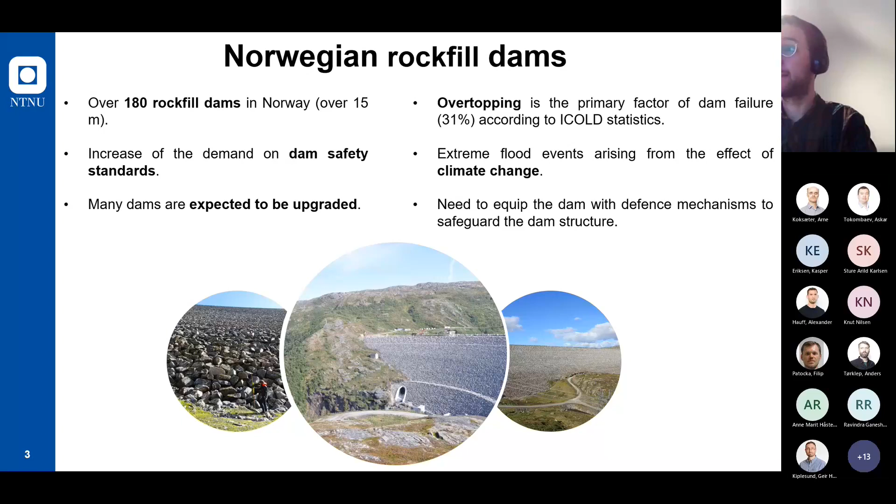If we go a bit more into detail of the overtopping mechanism, when we have overtopping conditions, the downstream slope of the rockfill dam is subjected to highly destabilizing forces. Those are generated due to both turbulent through flow, which is basically the overtopping of the dam core, but also overflow, which is the overtopping of the dam crest.

So the through flow mechanism provides internal erosion destabilization of the embankment inside the dam with an increase of the pore pressure, while from the overflow, we get external erosion processes.

So we have two key components in order to safeguard the dam, which are the ripraps and also the rockfill dam toes. The toe, located there on the pictures, can provide efficient expulsion of the seepage from within the dam, which decreases internal erosion and can then reduce the pore pressure.

While the riprap, and we will focus on that aspect today, can protect against external erosion due either to overtopping, as we said, or to accidental leakages.

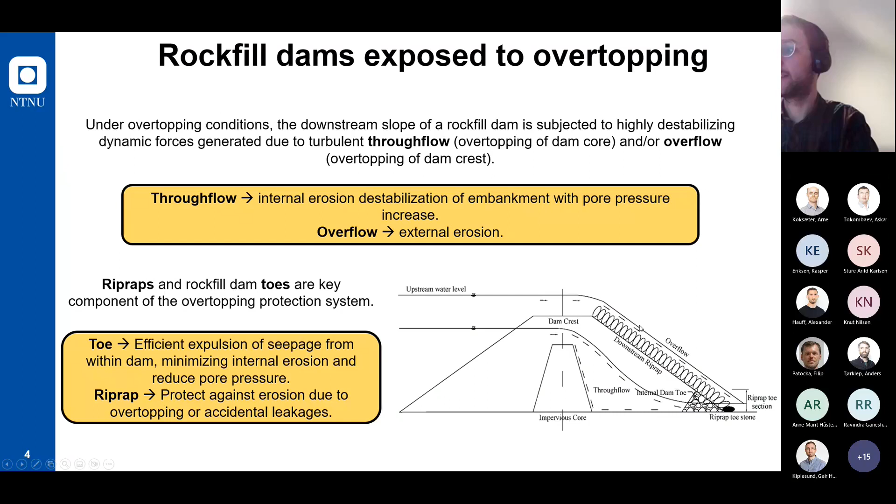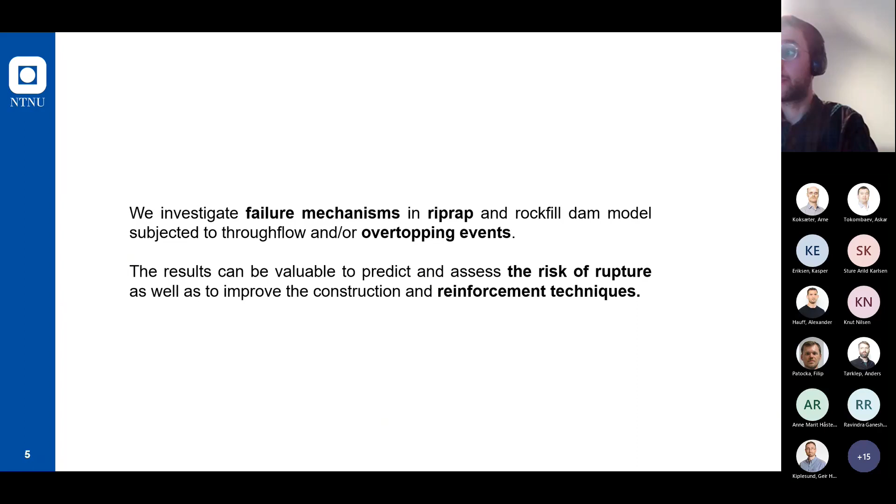So my topic, and the objective of the postdoc, is basically to investigate failure mechanisms in riprap and rockfill dam models that are subjected to through flow and to overtopping events. Such results would be valuable to predict and assess the risk of rupture, as well as to improve the construction and reinforcement techniques of the dam.

So I have split my presentation into different topics, different subsections, let's say, which correspond to different work I've been submitting or presenting in different conferences or journal articles.

So first I will start with an article that was published as a special issue in the Water Journal, which is an article about riprap protection exposed to the overtopping phenomenon, and it's basically a kind of review of the laboratory experimental models that we've had in the hydraulic lab. So it's not only my work, but models that were already built before I started.

So the common characteristic of all the experimental setups: they were all built in the hydraulic lab at NTNU, in that red flume you can see there, which is quite big, 25 by 2 by 1 cubic meters. We built models considered to be 1 to 10 scale models of rockfill dams, with the particularity that we have a very steep downstream slope of 1 to 1.5.

For all the models we've been building, we chose the material dimensions according to the NVE guidelines, the Norwegian Water Resources and Energy Directorate. Basically what we do is build the model and then expose it to incremental overtopping discharges. The discharge levels are maintained constant over a regular time interval to allow flow stabilization at each overtopping interval, then we repeat the procedure until we have complete failure of the model. This is what we're looking at.

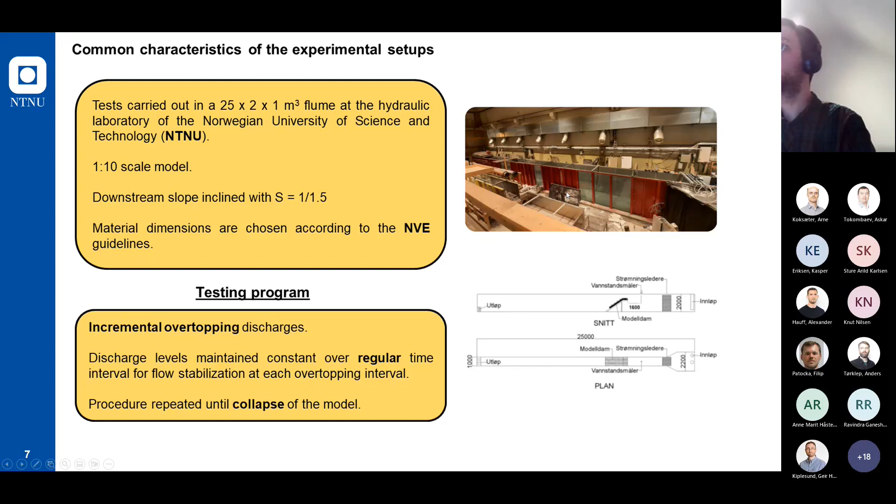I hope you can see the animations.

The first models to be built were built by Priska Hiller during her PhD, and then it was done again during Ganesh Ravindra's PhD afterwards. First, to study the stability of riprap, they were built on a ramp without any shell material below, just a layer of filter material with homogeneous grain size.

You can see we have two different configurations of riprap. On the left side is what we call dumped riprap, basically randomly placed stones put on the downstream slope without paying attention to their position. On the right side you can see placed riprap stones, which have been placed manually in an interlocking pattern so they fit together well. It takes more time to build those models, but they are much more resistant to overtopping.

When we expose those two models to overtopping discharges, in yellow there, you can see what we call the critical discharges - for which discharge level does the model fail? For the dumped riprap model, the model failed at 40 liters per second, while it was 275 liters per second for the placed riprap model. So you can see the difference in resistance between both models.

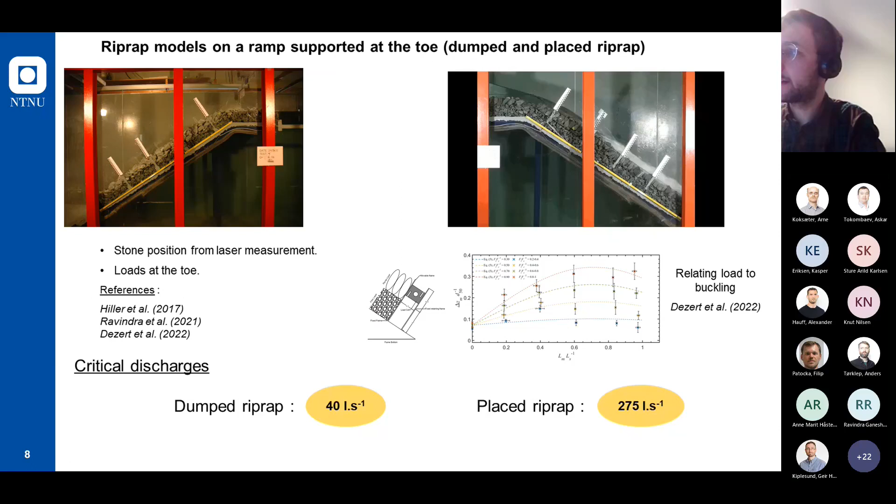However, for the placed riprap layer, the resistance is much higher when we have toe support - 275 liters per second when supported, only 60 liters per second when not supported. So the toe support definitely has a huge impact on resistance, and we still observe the same failure mechanism, the whole layer sliding instead of external erosion, everything sliding at once when we reach the critical discharge.

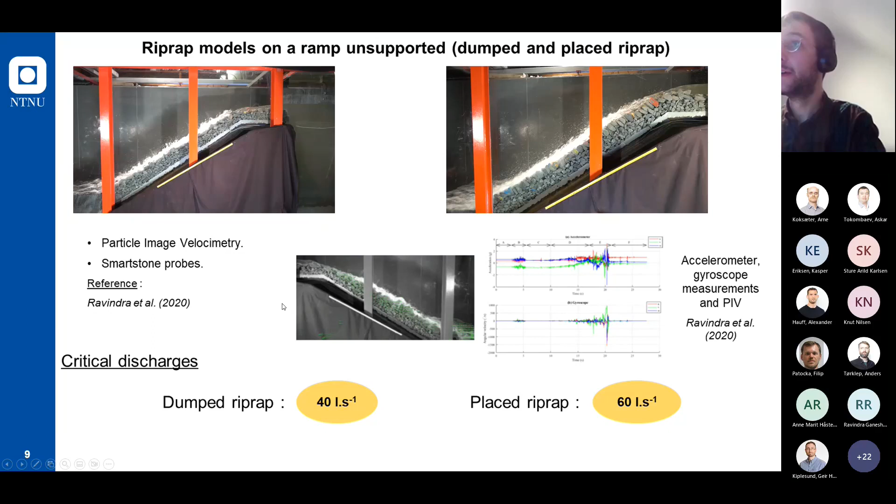From this model, Ganesh in his PhD could investigate the movement of the stones using PIV technique and also the use of smart stone probes. Then what was done, also during Ganesh's PhD, is build models with shell material below, so we could try to understand the impact of through flow.

As you can see, the critical discharges are about twice less important than when we did not have the shell material. For the model with dumped riprap, we have some external erosion reducing the steepness of the slope, then continuing eroding the shell material after eroding the riprap and filter material.

For the placed riprap layer, we observe the same mechanism as on the ramp: full sliding of the whole layer once we reach the critical discharge. Both of these models were not supported at the toe.

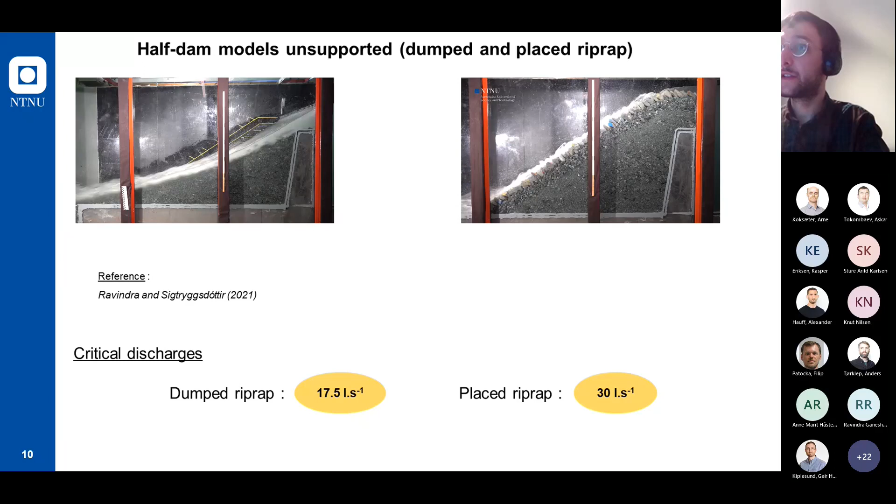During my postdoc, I could build the same kind of model, but this time supported at the toe. The point of this work was to see if we were still seeing the failure mechanism I told you earlier, which is the buckling. We have sliding of the whole placed riprap layer, but before the sliding there is a deformation of this riprap layer, which we call buckling, with deformation in the X and Z directions.

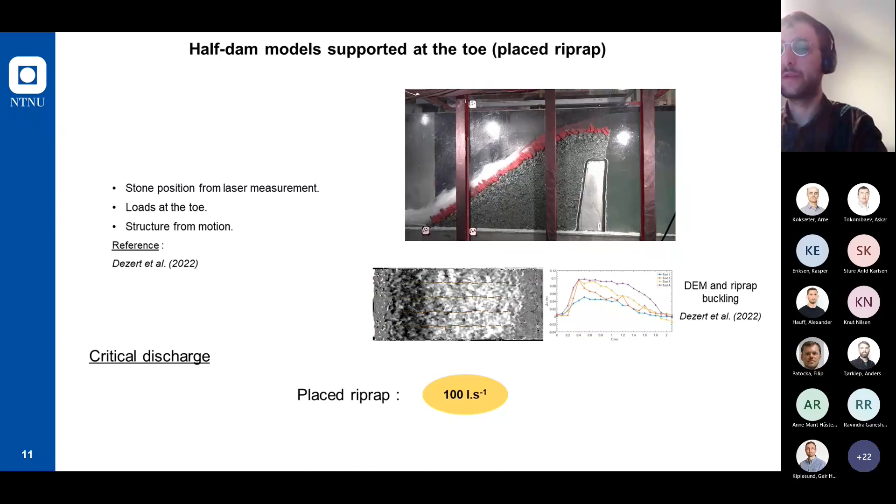The improvement during those tests is that we could measure the displacement of riprap not only from laser measurement as done before, but also using structure from motion to see the whole deformation from 3D models. We could also measure the load at the toe.

Finally, during Geir Kiplesund's PhD, he could build models with not only the downstream part of the dam but the full dam, for both placed and dumped riprap models, and we observed the same failure mechanism.

So with the dumped riprap model, guess what? Surface erosion, external erosion, reducing the steepness of the slope, slowly eroding the material.

And what we observe for the placed riprap layer is something just as before: much more sudden, with a whole sliding of the riprap layer. So there it is for placed riprap.

It's a totally different process. Everything just slides at once. That's mainly the difference between both models.

With placed riprap, more security, it resists more time. You see the critical discharge is higher, but when it fails, it really fails more suddenly. Geir could also work on structure from motion and use pore pressure cells to investigate that topic.

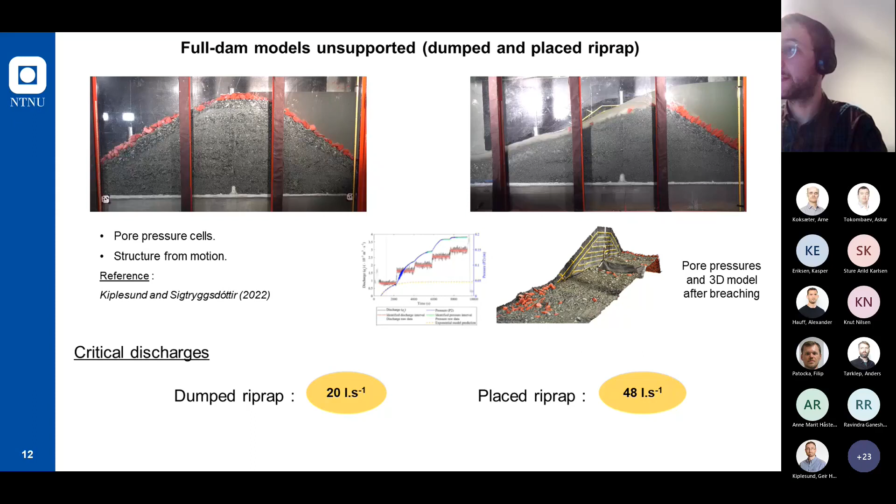So I can draw some research conclusions from this historical work that was done. First, the role of toe support.

What we know is that there is no impact on the surface erosion mechanism of individual riprap stones for dumped riprap models, and no benefit to dumped riprap models, where the protective layer does not act as a bearing structure as it does with placed riprap.

For the placed riprap model, the sliding phenomenon has been described for unsupported riprap, and we call it the buckling process for the supported ones. The supported placed riprap models are much more resistant than the unsupported placed riprap.

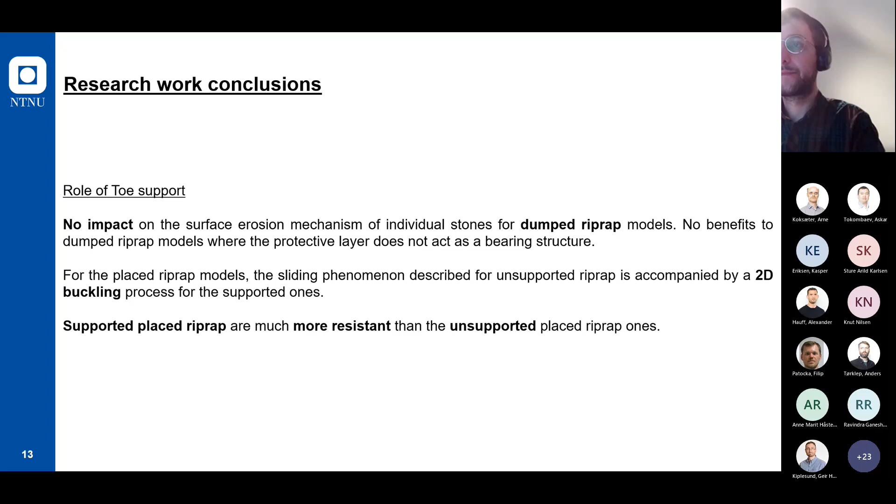Then there's, as I said, a big difference between dumped and placed riprap. When we have placed riprap, where the protective layer consists of interlocked stones, the failure mechanism is always a sliding process, with buckling when it's supported, and it's always a surface erosion process for dumped riprap models.

We observe supported placed riprap models to be 7 times more resistant than supported dumped riprap ones, and all the other unsupported placed riprap models demonstrated a resistance still 1.5 to almost 2.5 times superior to dumped riprap ones.

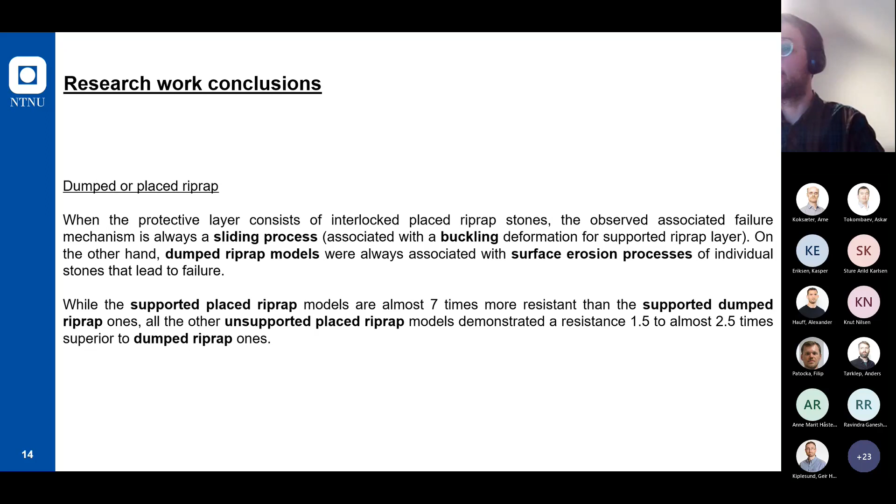And finally, the impact of through-flow. Definitely the through-flow has an impact on the resistance of the model, making them less resistant. It has an impact on the whole stability of the dam, as we could guess.

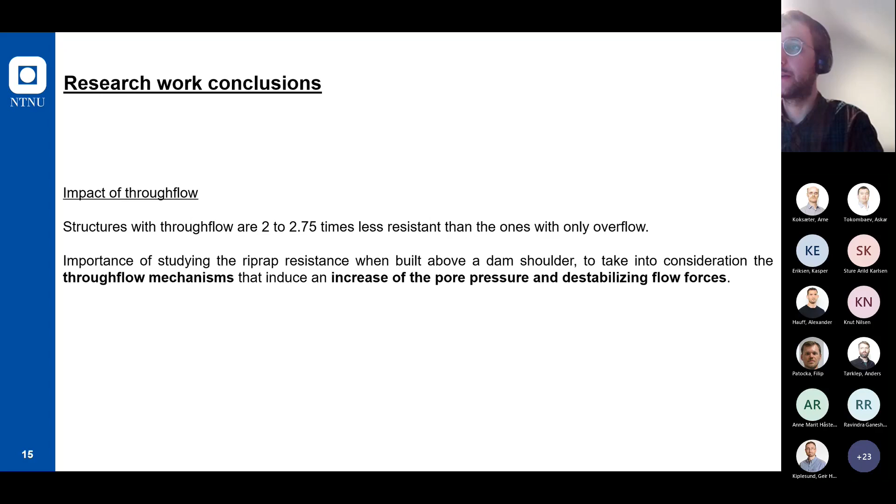So it's very important to keep studying the riprap layer deformation and evolution with shell material below when working on overtopping phenomena. I then had the opportunity to present my work at the IAHR conference in Spain last year, and also publish an article in Water Journal on placed riprap deformation.

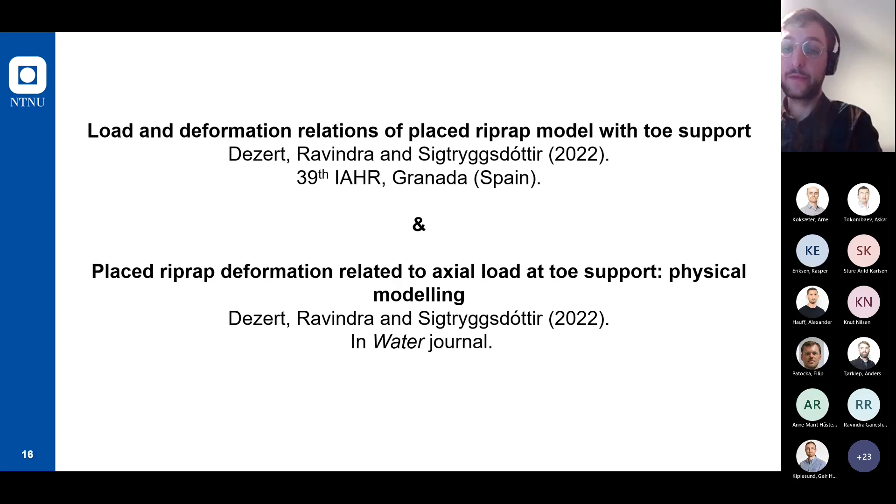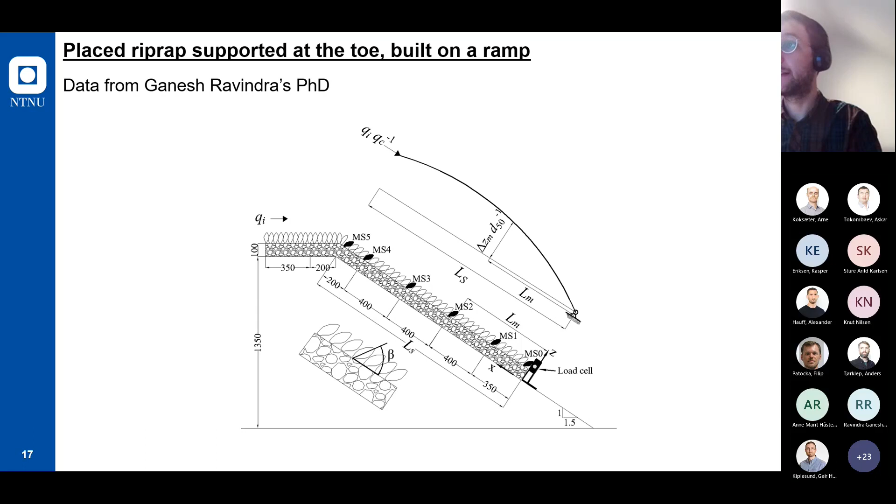So it's about the model I just introduced to you. This is the model that Ganesh built during his PhD. He collected some data that he did not have time to process and publish, so I kept on with the work.

We had, as you can see, the placed riprap layer over a filter layer without shell material. We could measure the load at the toe from 6 load cells, but also the position of individual riprap stones that you can see in blue — 6 riprap stones, 1 on the crest and 5 on the downstream slope.

We could expose the model to overtopping discharge levels maintained constant over a regular time interval. That interval was 30 minutes, in order to have flow stabilization at each overtopping interval, with incremental overtopping of 25 liters per second.

As for the other model, we repeated the procedure until total failure of the models, and Ganesh had the opportunity to carry out 5 of those tests.

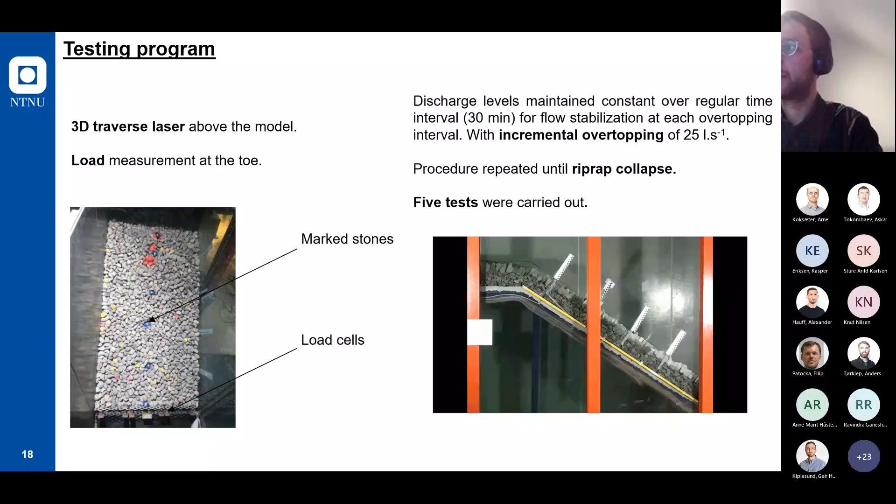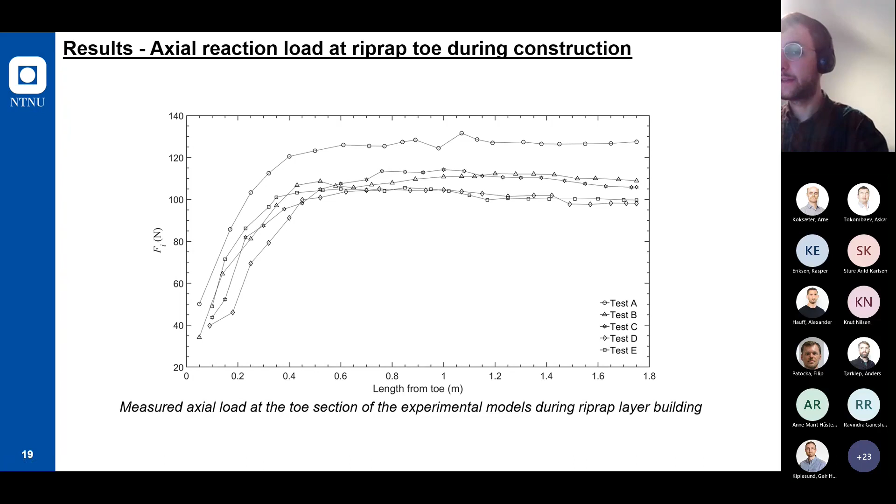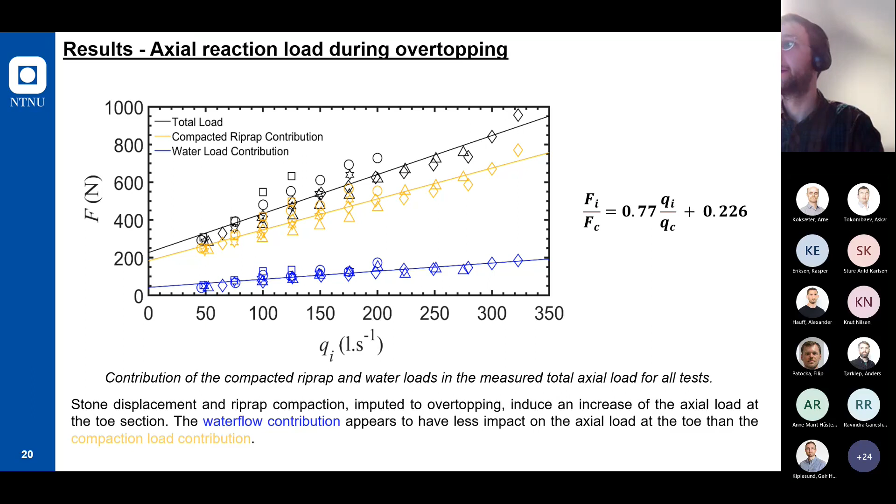So we could draw a linear relation between the load and the discharge level from those models. Then what was investigated was stone displacement. Ganesh did that previously in his paper, relating the discharge level with the displacement and the buckling of the stones. But from the load cell data, we could also get the same kind of relation, because there's a strong relation between discharge and load.

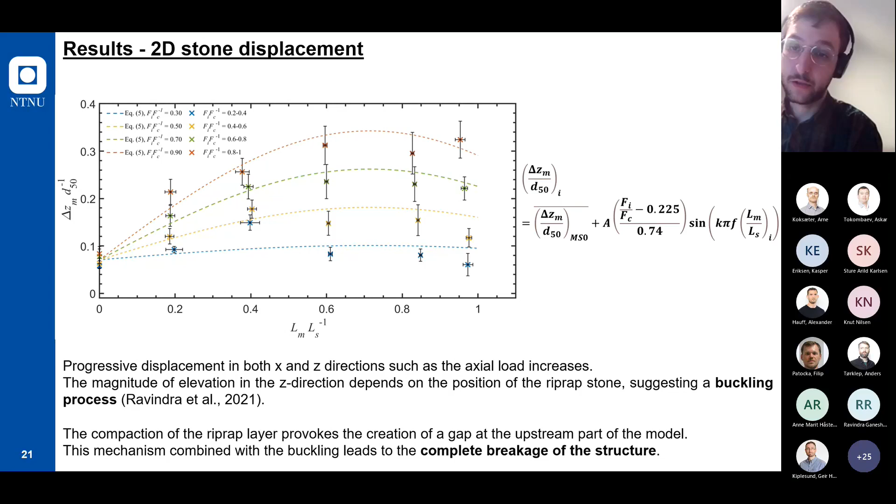So that was one of the works I could do. Now I'm going to present the 3D displacement, which is quite related to what I just showed you, but we use a more advanced technique without just relying on individual stone position measured by the laser. We use structure from motion in this work. Let me introduce that to you.

For that test, we built 4 different models. I didn't build all the models myself - I was helped, fortunately, by some master students, because it gets really heavy and time consuming to build those kinds of models. I can't remember how many kilos or tons of material we have, but surely Georg, who is present there, may be able to answer that question. We have to use shovel, barrow, and strength to build those models. It takes a few days to do.

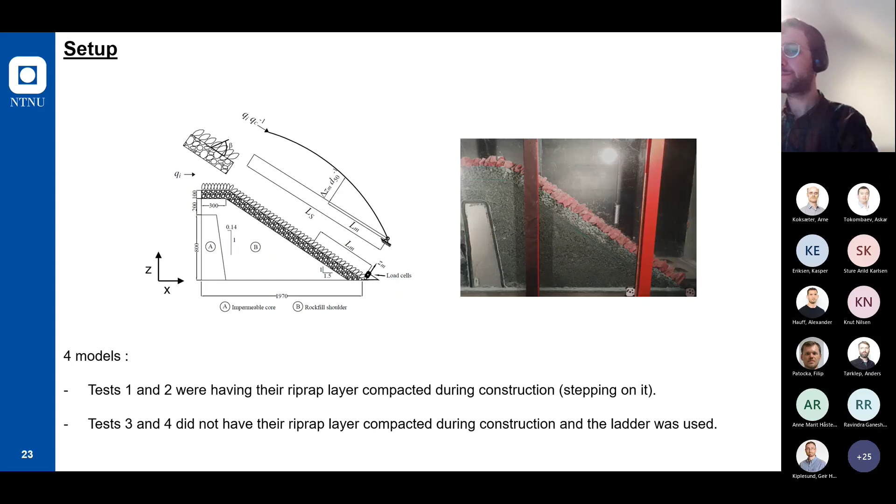The big difference between the first two models we built and the last two models is the compaction of the placed riprap layer. Test 1 and 2 had their riprap layer compacted during construction—we placed the stones individually and stepped on them to make it compact. For test 3 and 4, however, the riprap layer was not compacted. We used a ladder parallel to the slope, walking on it and placing the stones carefully to avoid putting too much pressure on them. It's an important point for this study.

As I said in the previous slide, we observed a sliding phenomenon. The point of this work was to see if we could really observe the buckling phenomenon described for placed riprap supported at the toe but built only on a ramp.

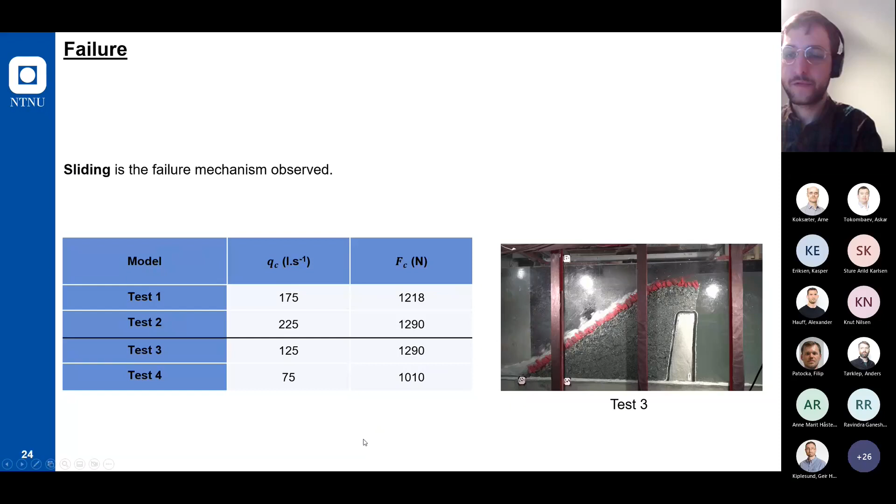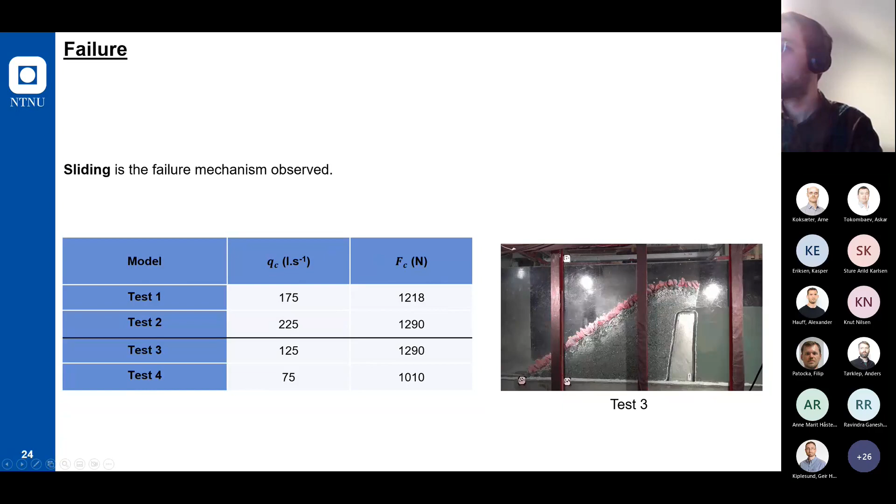However, what's quite interesting is that even though the critical discharge value is very different between compacted and uncompacted tests, the critical load measured at the toe is not that different—we're still in the same range. That was quite interesting to observe.

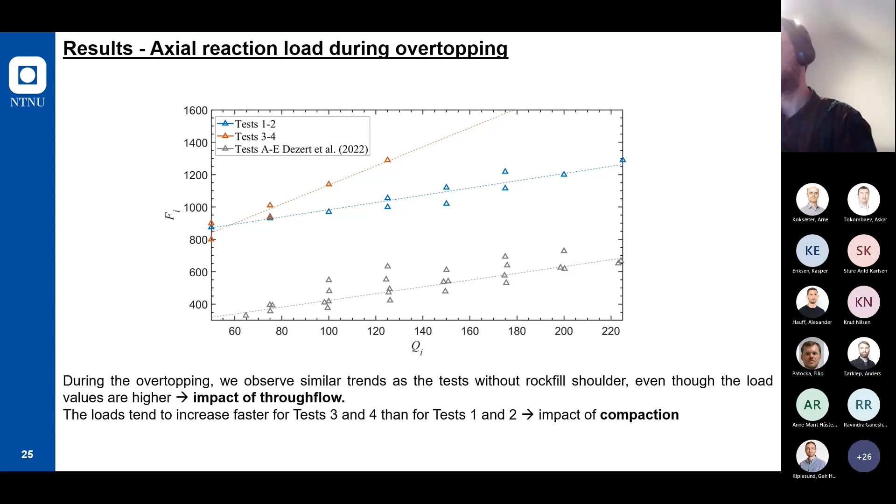The thing is, we could stop the overtopping discharge. We started at 50 liters per second for 30 minutes overtopping the model. Then we stop the flow and take as many pictures as possible all around the model. Then we restart the flow, increasing it by 25 liters per second, bringing it to 75 liters per second. We run the flow for 30 more minutes, then stop it, turn off the pump, and take many pictures of the model.

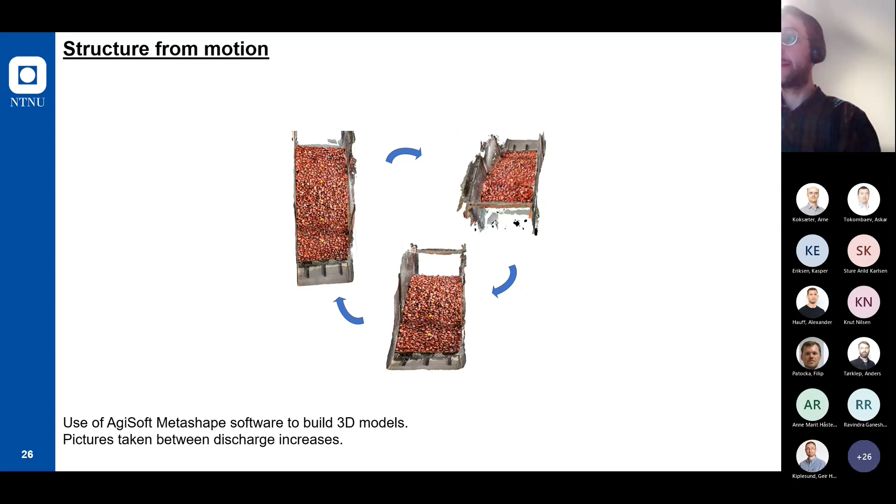From those many pictures of the model, for each different discharge value, we're able to make 3D models using structure from motion technique, using Agisoft Metashape software. Those models were really useful to increase our knowledge and understanding of the deformation of the riprap layer. Before, we were using just laser measurements, using only 5-6 positions of riprap. Now we can use the position of more than 1,000 riprap, so it's much more representative.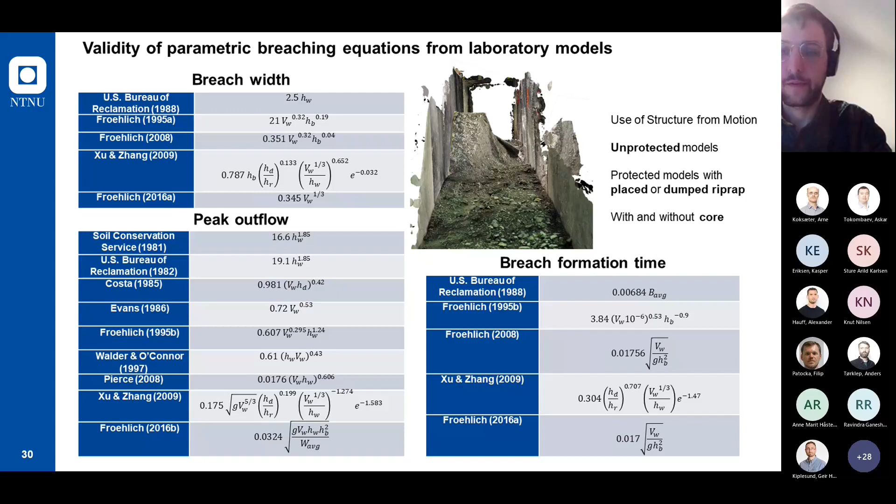Also focusing on the same topic, the suitability of those equations, but trying to see the validity not only from the experimental model we built in the hydraulic lab, but also from the Impact project you may have heard of, held in Norway. It was about 20 years ago now, so it's been quite a long time, but we still have the data, so we can work with them.

It was on Korgen dam. I'm taking data from 3 different models: one from an earthen dam, a homogeneous clay-fill dam; one from a homogeneous gravel dam; and one from a more complicated dam with non-cohesive rockfill material with a core, or central moraine core.

I'm working on the development of the breach when they are exposed to overtopping, so we can get a better picture to understand the opening of the breach.

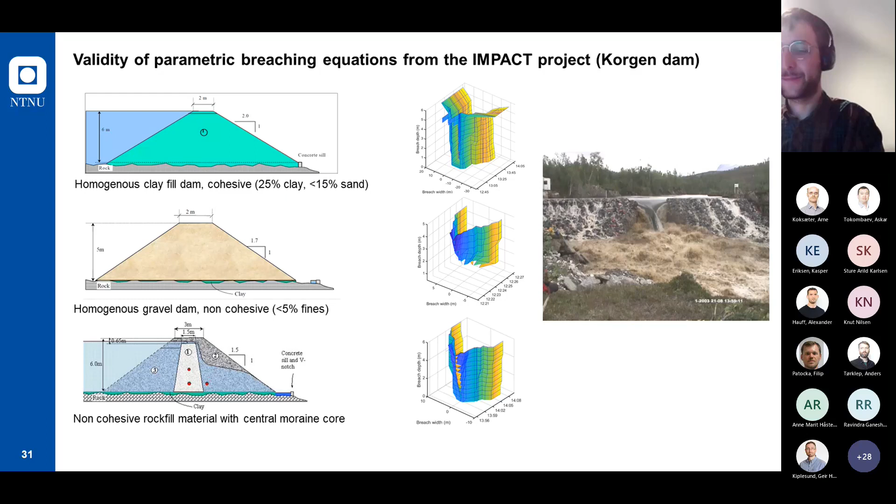So we can talk more about that if you wish, but I don't have any more results to show from now on. I think it's the end of the time, so I'm open to any question you may have. Thank you.

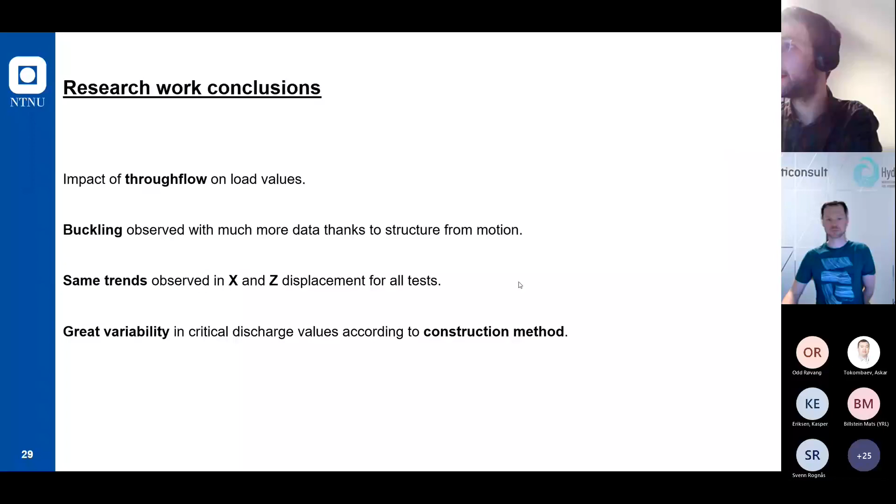It just comes all of a sudden, so it's quite exciting. But when we investigate the data, we can understand the displacement of the riprap layer. If we had 3D models live, we could see the movement and clearly see the generation of a gap. When you see that gap on the crest, you can say it's more likely to break because the gap is more significant.

But you can't say it will break within one minute, because sometimes we know the previous model built exactly the same way broke at that discharge level. So you're looking for the next model to break at a similar discharge, but sometimes it takes more time, and you're waiting 30 minutes, an hour more, and it still doesn't come.

You just know you have one or two hours where you should stay and not go to the toilet, to make sure you see the breakage, but you can't be exactly sure when it's coming. It's pretty much a guessing game. We try to guess and often fail. Oh, it's going to come now. Nah, and then we wait another hour.

Yeah, and that is what I suppose is very scary for the dam owners, that it's so unpredictable.

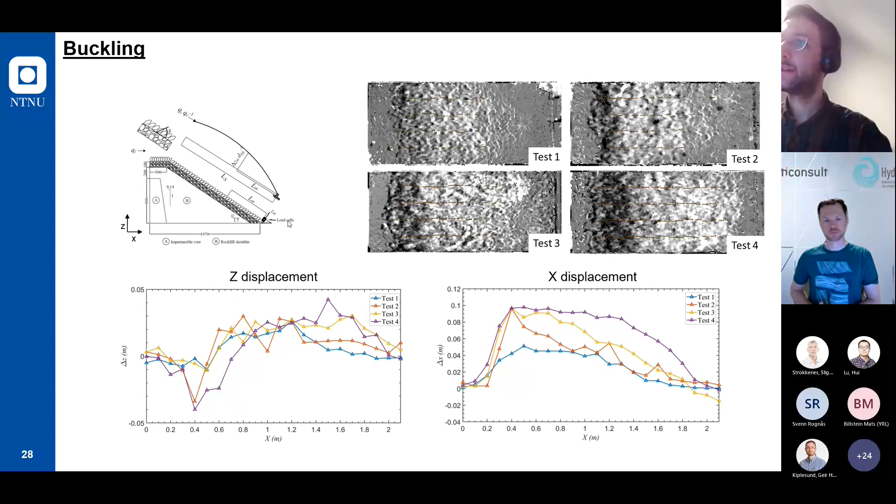But still, as you can see for those models with the protected riprap supported at the toe, the critical discharge value is very different depending on whether the model is compacted or not. But the load values are not that different, so that could be a tool to really measure the load at the toe. When you reach that critical load value, it's more reliable than the critical discharge value. So this is an important parameter to look at.

One thing I could comment on that you didn't mention was the different thicknesses of dumped riprap. We saw some interesting things there as well. Some tests were done with a thicker dumped riprap layer than Ganesh's earlier tests.

Those failed quite differently, in that there was an initial displacement, but not sufficient to initiate full failure. There was sliding, but then it stopped, and we had to ramp up to a much higher discharge until we actually got a failure. But drawing general conclusions from it is a bit tricky, because that might be relevant for lower dams with fairly thick riprap, but wouldn't apply to a very high dam, for instance.

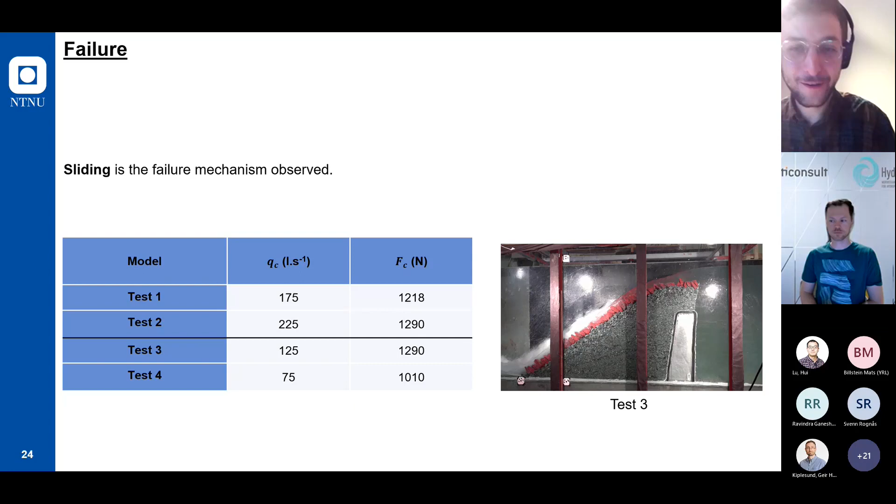And about the toe support you mentioned, there's no clear guideline for building those toe supports in the NVE guidelines, so it's very complicated to know how representative our toe support is compared to real toe supports found in the field. Ganesh also published an article on that, they went into the field. Maybe you want to talk about that, Ganesh, about investigating the different toe supports you could see in the field on rockfill dams, very different kinds of toe supports, some without any real explanation of their purpose.

But another important thing to remember is that we've been saying placed ripraps are stronger than dumped ripraps. But I'm thinking the objective is to design a riprap for a given overtopping discharge, not to build a stronger structure. The question is, stronger compared to what, and why? I think for a given overtopping discharge, you get much less uncertainty when you choose a dumped riprap compared to placed riprap, because the uncertainty margin is so huge, there's so many parameters.

I think we should come up with a method, and we're working on this, coming up with a method where we need to look at different situations, for example through-flow and overtopping, and come up with strategies to secure the dam against damages. That's also a very important thing we're working on, and it would be really interesting to collaborate further. We need to understand there are different failure mechanisms, and every dam is different. Right now there are these constants in regulation saying every class 4 dam should be dimensioned for 0.5 or 0.7, something like that. I think that's also tricky, to give fixed numbers. We should take every dam as a case and then look at the strategy for how to stabilize the dams. Sorry for the long comments.